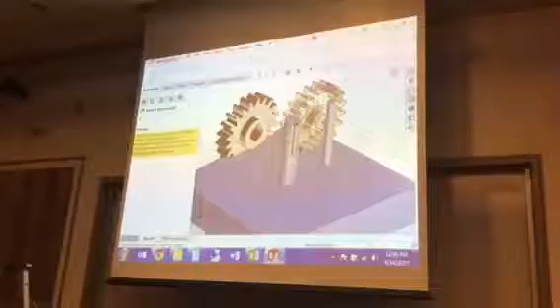File, save as copy and open. Save it as something that makes sense to you. And then we can go ahead and insert this. So I'll start with the concentric.

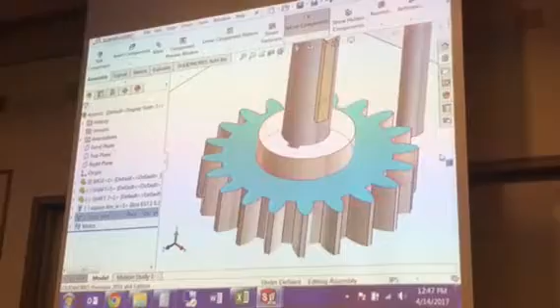And then I'm gonna just grab these sides. Okay. Did not like that. Okay. And then we'll just go ahead and align the top faces. Okay, so now when I spin, the gear and the shaft are spinning together. Okay? So that's the first one.

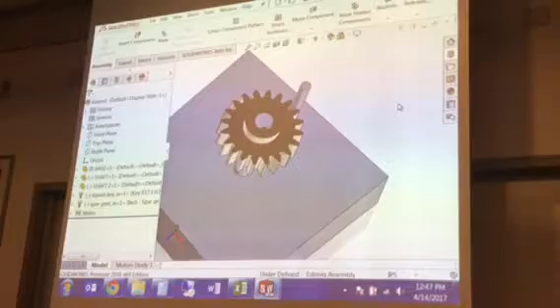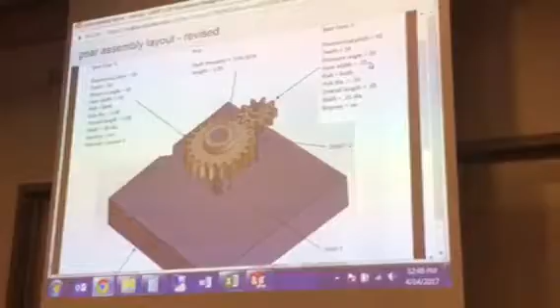Second one is just slightly different, but again, spur gear. This one has 10 teeth. And it's got, let's see, face width of 0.25 and then 0.5, 0.5, 0.25. Face width of 0.25. Hub style is both sides.

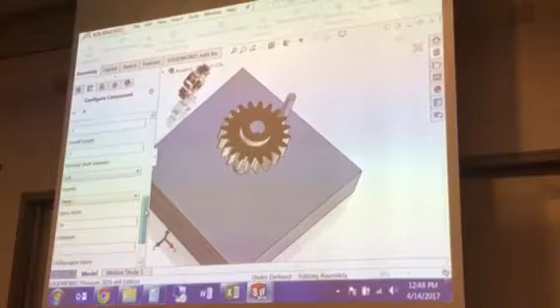Hub diameter is 0.5. Can you go back in and reconfigure a component after you place it? Yep, I'll show you that in just a second. 1/4 inch, keyway none, and it already makes that selection for me. 10 teeth, and we're good. Okay. So I can always click on the component, right click, and edit toolbox definition if I've specified something incorrectly, and get back into that configuration mode for that component.

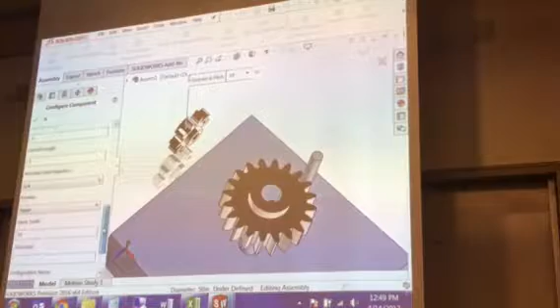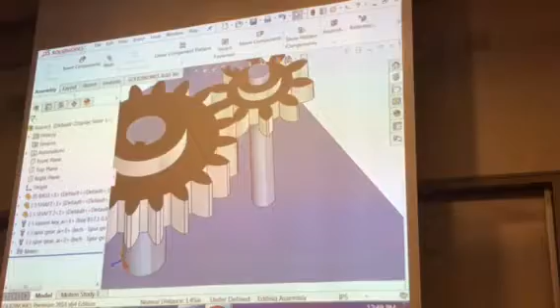Okay? You're welcome. All right, so this one's pretty much a piece of cake. We don't have a keyway to align off of, and I'm gonna line up these gear faces, but that may not necessarily be how you wanna do that. But I can still spin this relative to the shaft, so I can go ahead and edit that concentric mate to lock rotation.

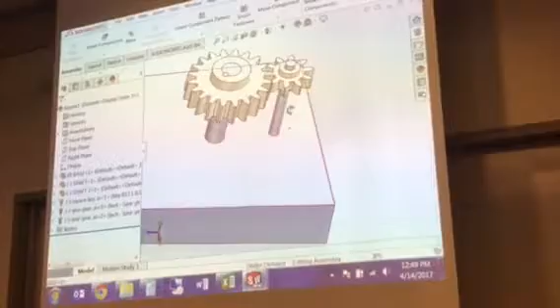I remember when to do that, you had to mate planes together. Yes, in the past, there was no lock rotation, so you had to find planes. So you would have been looking at the planes within the spur gears and trying to line those up with different faces on the shaft planes, which for circular components like this wouldn't have been terribly difficult, but it would have been just another step.

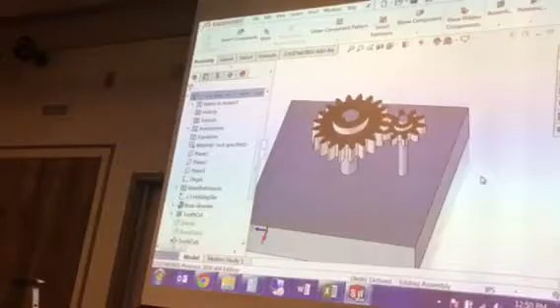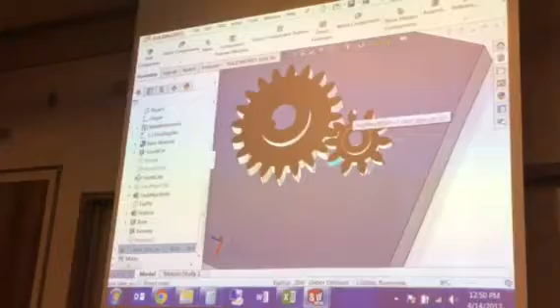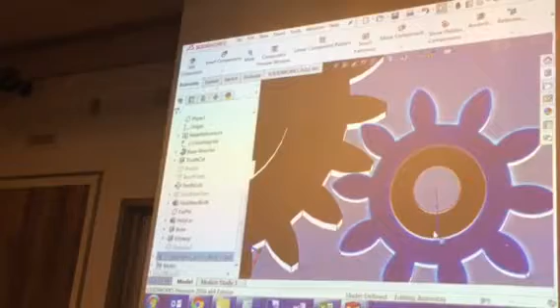Okay. All right, so to line these up, how did we line up our gears before? Remember? With the axes? The axes of the mechanical mate? Oh, the gears. Before that, yeah. So how did we line them up visually? Do you remember? The teeth within teeth, like eyeballing it? Yeah, so we were doing a tooth-to-tooth axis. But these teeth are a little bit different. You can see that you don't have that curvature in there with the corresponding axis, and you don't get full engagement. This is a more realistic tooth structure than the other ones that we saw in last week's assignment.

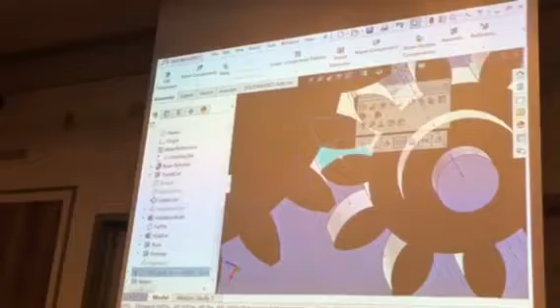You can try a few different things to line these up. What I've decided to do and what I think probably works best is to put in a tangent mate between those surfaces. Okay, so now that's what your contact would look like. Can you not just do a gear mate between the axes of both gears? You can, but this is just to get them lined up before we do that. Oh, okay. So now they're lined up how they would be touching when they spin.

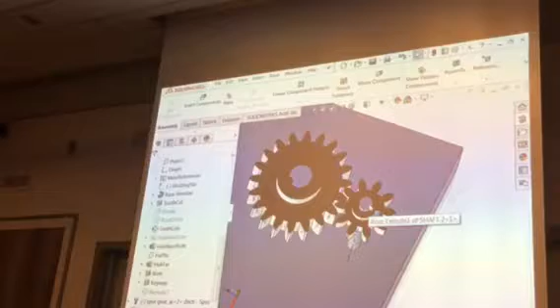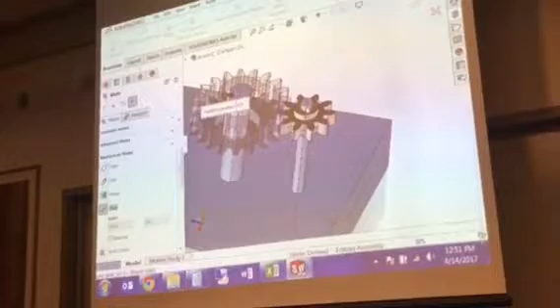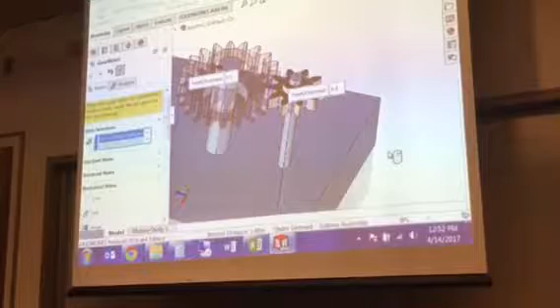And now I can go in and put in my mechanical gear mate. Just make sure that you choose the right axes. I just like to use select other here to know that I'm getting the axis of the gear and not the axis of the shaft. Okay? Wow. That I've never seen before. I'm gonna choose that again just to be sure. Axis of the spur gear, let's try that one. Huh, that's interesting. Wasn't popping up like that before.

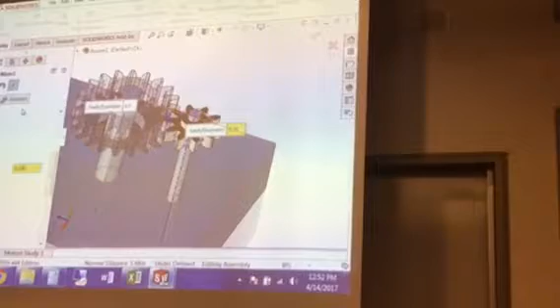So we've got a 0.5 to a 0.4. We know that that's not true. We've got 20 teeth on here and 10 teeth on here. So what kind of relationship do we want for those numbers? 2 to 1. So I'm just gonna change this to a 0.25. We'll get our 2 to 1 relationship, and that makes sure that they visually rotate in the manner that they're supposed to.

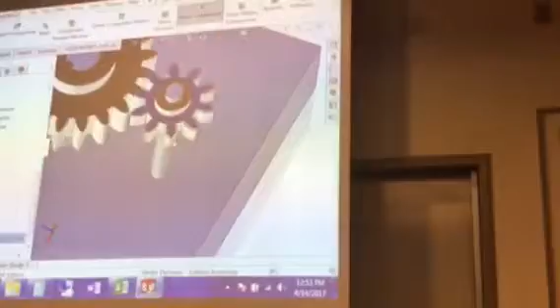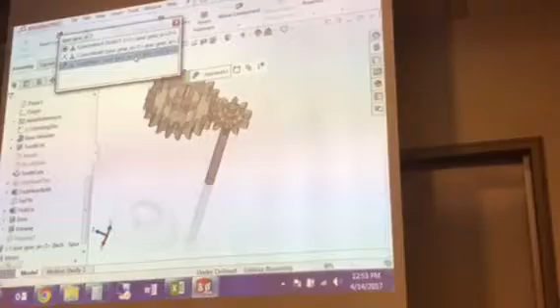So, we should be able to, uh-oh, I went to the wrong side. I think I made it to the wrong side. It seems like it doesn't show the ratio. Is it the ratio? Yeah. Something weird is going on there. It did not do that yesterday. Let's delete it and try it again. Okay. So, I'm not gonna line them up right now. I'm just gonna eyeball it and get it close. Yeah.

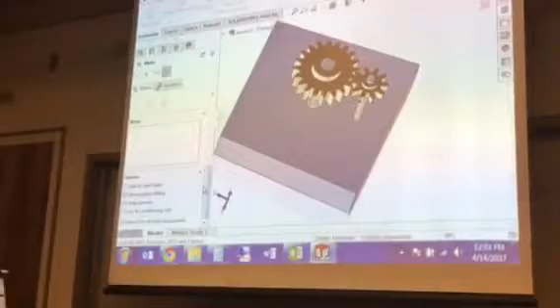This is the joy of SolidWorks. Sometimes you just do it a second time and it works out. Sometimes it's the third time. Software. Alright, let me make sure.

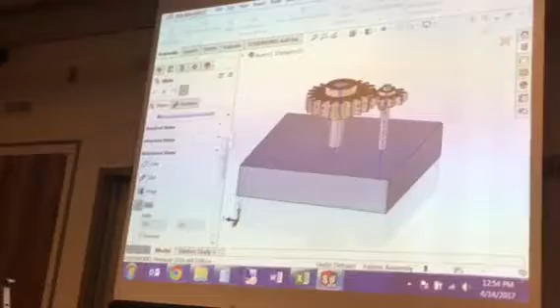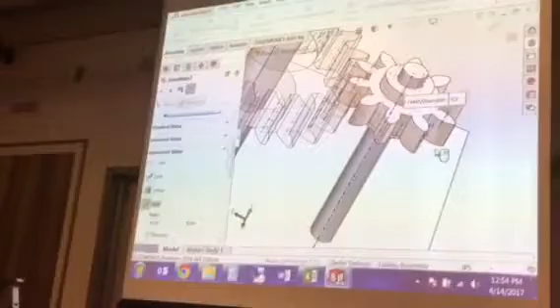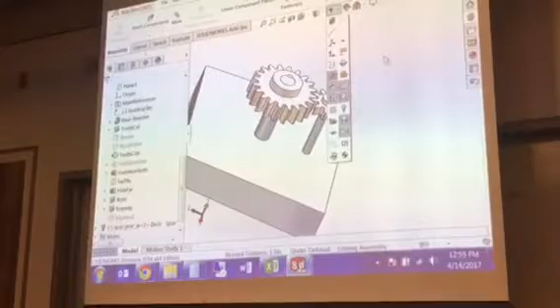You can also go into your drop-down tree here and select things too. Alright, so there it gave me a different ratio. So I'm just gonna change this one to 1, which is what I did yesterday, and see if that works. Okay. Okay, that seems to be working a little bit better. Alright, so not too bad. Shouldn't take you all that much time to put this together.

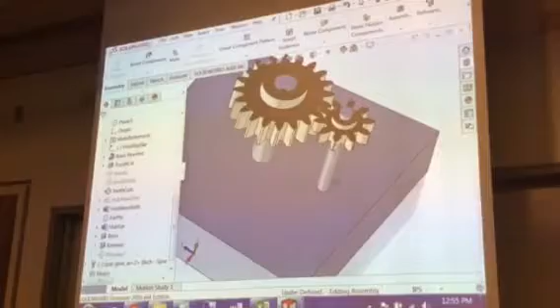Make some just general assumptions based on Jennifer's pictures about how to align the shafts to the base and these two gears to one another. It would really depend on how they were mounted. I would think that you'd probably have these two aligned a little bit differently than that. But just go ahead and align things based off the picture.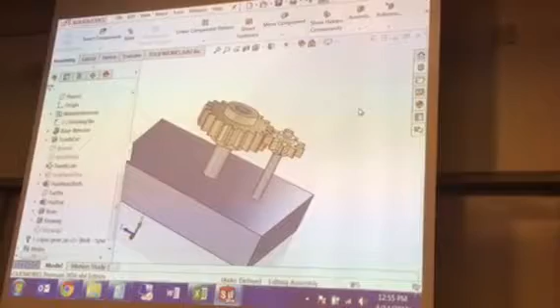Okay, any questions? So what was the final ratio you typed in to get it to work correctly? I had 1 to 0.5. Yeah, yesterday they both popped up at 0.5, and then I just changed 1 to 1 and made it 1 to 0.5. Theoretically, anything should work in there, but that 0.4 coming up was a little bit odd. A 1 to 1, that 0.4 was weird. I'm not sure what SolidWorks was thinking there.

Okay, something to know. There is a component in here named shaft in the soap delivery system. You also have something named shaft. If you have both of them open at the same time, it will replace whatever one with the other. So either rename one of them or don't work on them at the same time. And if you're going to rename something, rename the gear system before you produce your assembly. So I would come in here.

We haven't talked about it a lot, but SolidWorks maintains file paths and relationships. So if you change a name in just regular old Windows Explorer, it can blow up some of those file paths that SolidWorks maintains. So there's something called SolidWorks Explorer. Anytime you are having to modify names, file locations, anything for SolidWorks files, you have to use SolidWorks Explorer. It's basically like Windows Explorer, except I think a little more tedious.

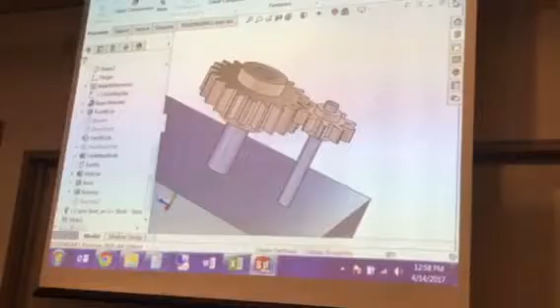Okay. All right, so I'm going to close out of this. Any last questions before I move to the drawing? Because I don't want to interfere with the file name issues. Okay, so on the soap delivery system, I actually have the drawing, but you guys are creating the drawing. So I'll open it up to show you a few things, and then we'll go ahead and create it.

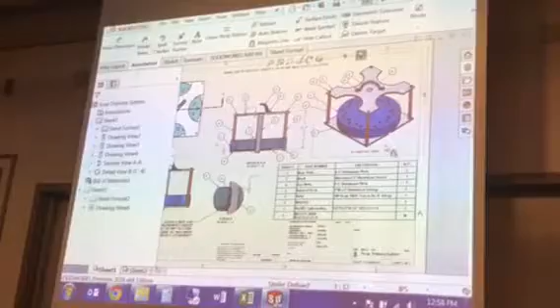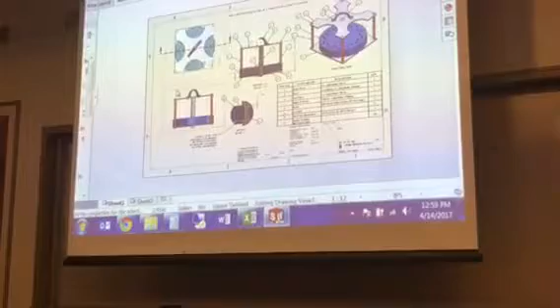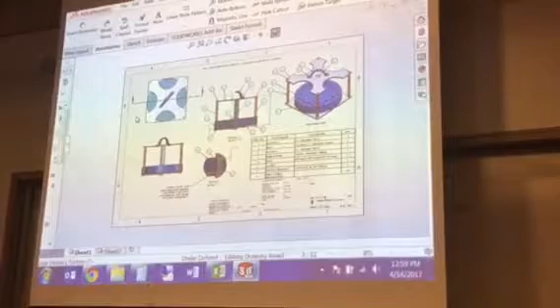All right, so what kind of views are we working with here? What standard views? This one is, you have two projected views here, so typically they would be front and top, yeah. So if I move one of these, this one doesn't move sideways, so the first one that the person who produced this drawing, which was probably Jennifer, put in was the top view. And then she projected the front view. And you always, for your standard views, whatever they may be, front, back, left side, top, right, bottom,